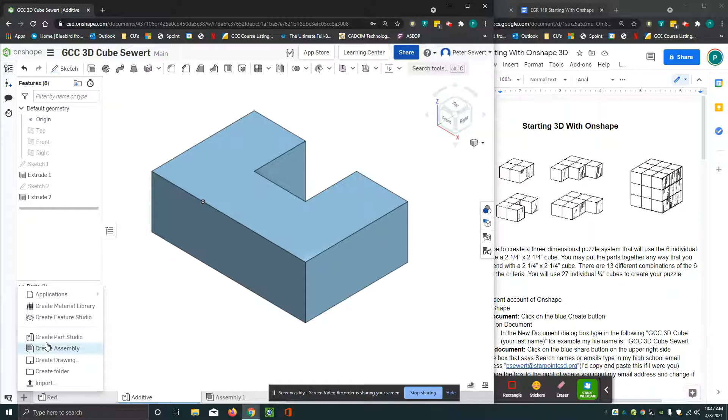So to start a new puzzle part, I'm going to hit the plus sign. I'm going to create a part studio. I'm going to get my 3 views on here, my 3 work planes. I'm going to click on sketch, and I use the front work plane frequently. Right click and say view normal to. Now I'm going to draw this

U-shaped cube again. So I know that we are 2 cubes high, and because each one of these blocks is 3/4 of an inch cubes, this is going to be 1.5 inches tall by 2.25 inches long. So rectangle tool, I'm going to click on the origin, pull it out, I'm going to click and type in my length, 2.25. Oops. I got to turn on my numbers like that. 2.25. That worked. Okay, good.

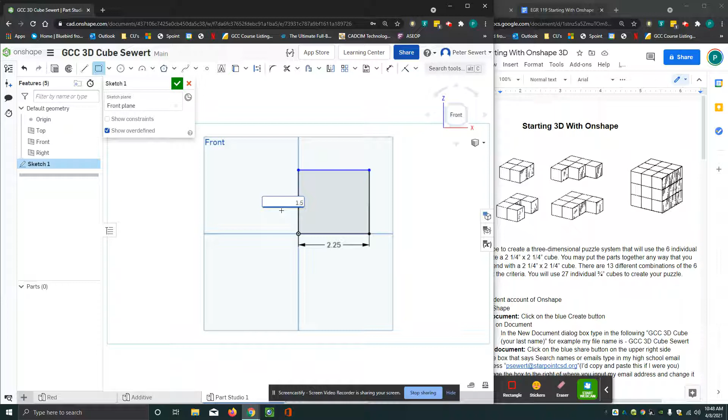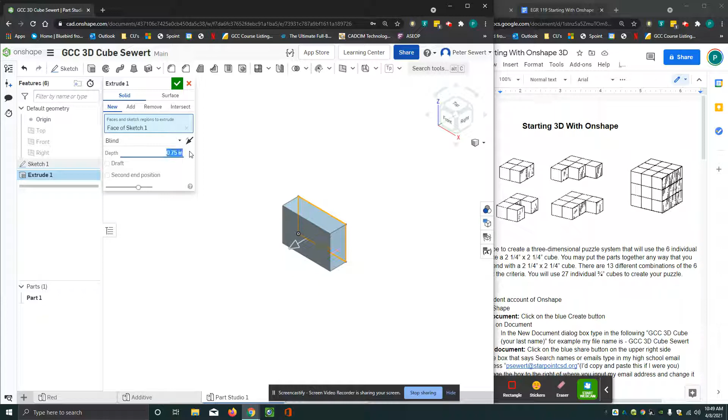Now I'm going to bring my cursor. I'm going to hit enter there, and it puts me into this other dialog box. And I'm going to make that 0.75 times 2 is 1.5. All right. Green check box. Right click, isometric. I'll turn off the icons, and I am going to extrude this, and this is going to be a 0.75 inch extrusion, and I'm going to green check mark.

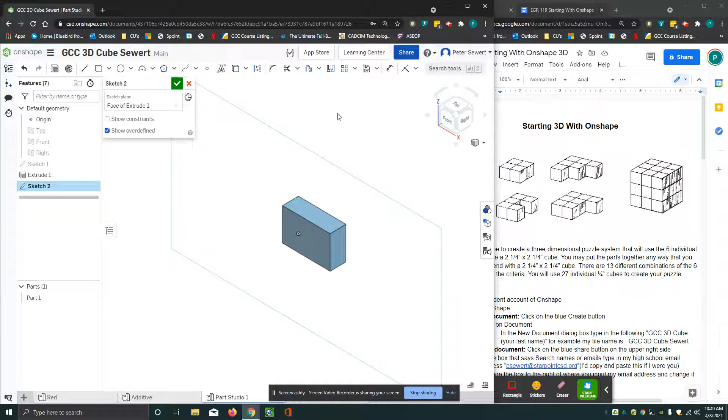So we've got all this drawn here, with the exception of the center section being taken out. So I'm going to now click on sketch. I'm going to go to this front surface and click on it, and I'm going to right click and say view normal to. And all I did there was I just created my sketch on the front surface of this cube. Now I'm going to zoom in so you can see this nicely. I like to work zoomed in.

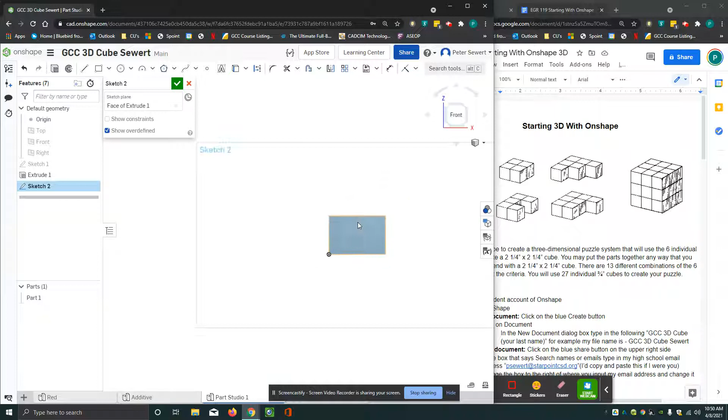I don't like working on stuff like this. Matter of fact, working on something like that cost the company I work for once a lot of money because I misdimensioned something. All right, so excuse me.

Here we go. I'm going to use the rectangle tool, and I'm just going to come to this upper line, and you'll notice it turns orange, which means that it's going to be constrained to that line, which is what I want. And I'm going to pull this down to the lower right corner, and as long as you start somewhere along the top of this line to the left of the middle of it and pull it down, you're fine. You'll notice all these lines are a bright blue, which means that they are not constrained yet. So to constrain this, I'm going to start putting some dimensions on.

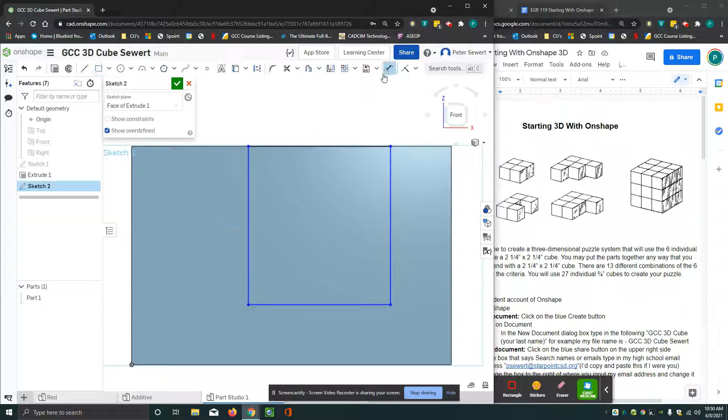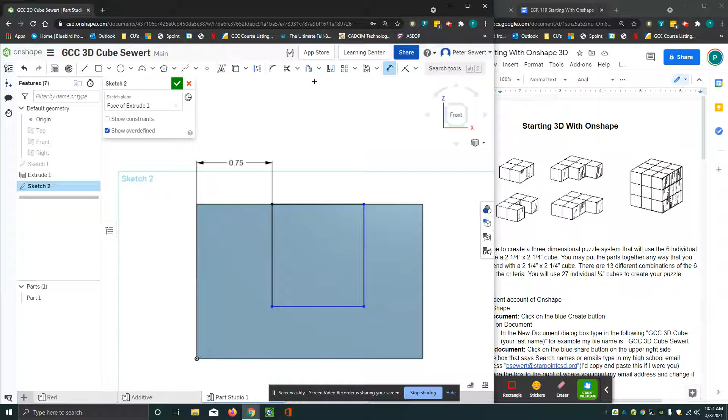So I click on the dimension tool, and I'll zoom out so we get a little bit of room here. And to do this dimensioning, I'm going to click on this line on the left and this blue line right here. And I know that that is the length of 1 cube, which is 0.75. Now I have a choice here. I can do chain dimensioning, which is perfectly fine to do here if I want to. So my dimension tool is still going. I'm just going to click on this line and pull this down here. I'm going to put in 0.75.

So now the distance from here is 0.75. From here to here is 0.75. And notice this line is black. The only one that's still blue, because it's not fully constrained yet, is this guy right here. And the constraint that it needs is the length of this right here, and that's got to be 0.75 also.

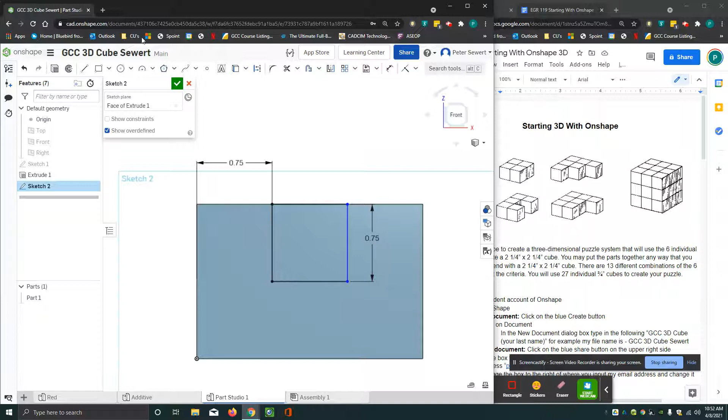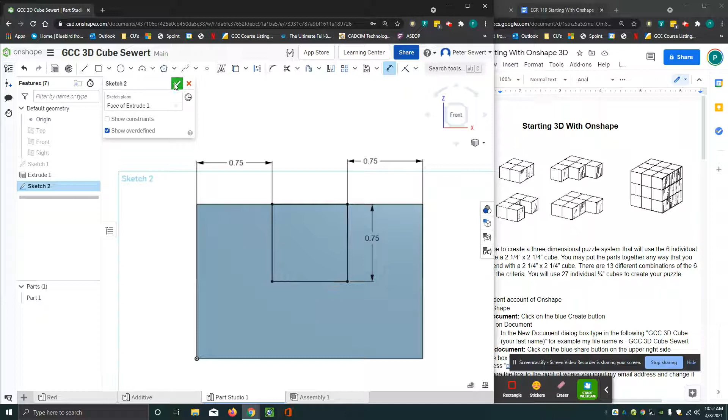Okay. Now, the other way I could have dimensioned this, and I'm going to just delete this dimension, is I could have done this for my dimension. I'll start my dimension, click on this line, and go to this one right here, and that is also a perfectly fine way to do this. All right, so everything is dark on here, which means that the thing is fully constrained, and you really, really want to have things fully constrained. I'm going to hit the green check box, right click, isometric.

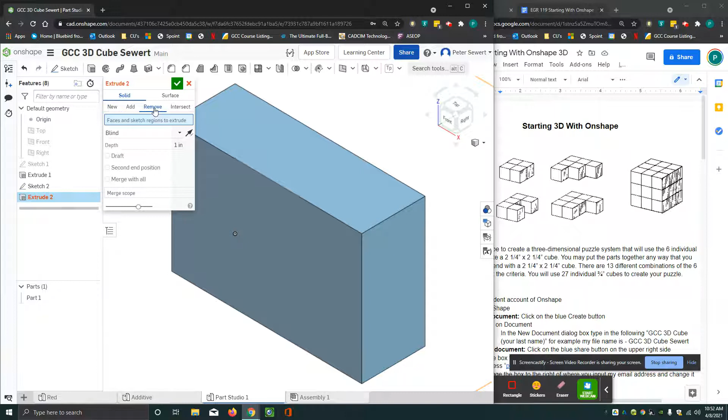This is subtractive, so I'm going to click on the extrude, and I work from top to bottom. This is not a new thing. We're not adding anything, we're removing. So when you subtract, you remove. So I click on remove. Now it wants me to select what I want to remove, which is this cube right here.

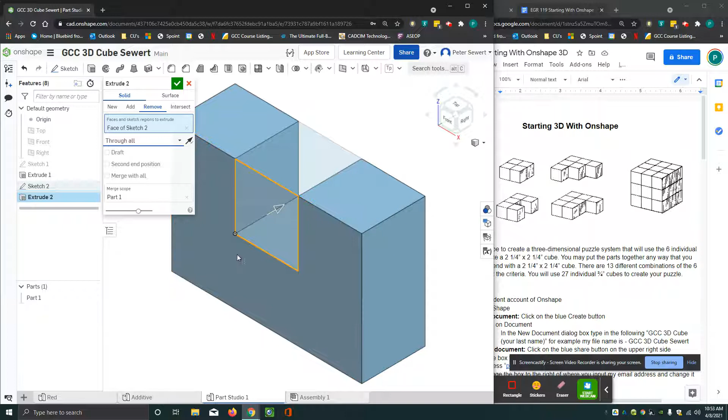And instead of this saying blind and 1 inch, which would work for what I want to do, it is a better practice CAD-wise to click a different extrusion technique or subtraction technique. You can choose up to next, or up to face, or up to part, up to vertex, or one I probably use mostly myself is through all. And you can see the preview changed there. Now, I just hit the green check mark, and there is my cube done subtractively.

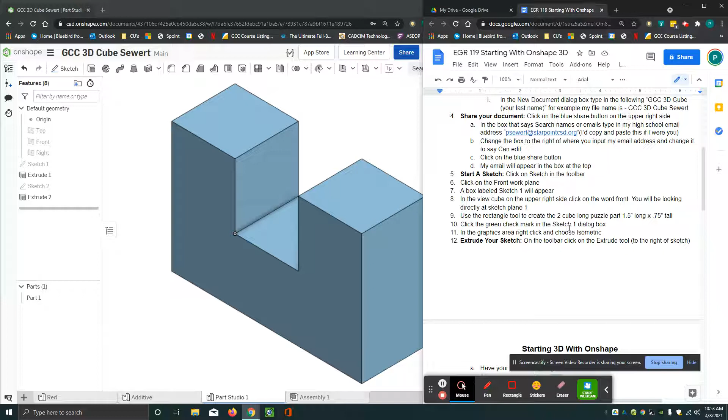Now, just like in the very first one that we practiced together, you're going to change its material to PVC, no, ABS, sorry. You're going to change it to ABS, and you're going to change its color to whatever you'd like it to be. You can then go down here to Part Studio number 1. That's what this is called. And you can change its color to match the color that you have picked for the cube. Okay? All right. So that is subtractive modeling.